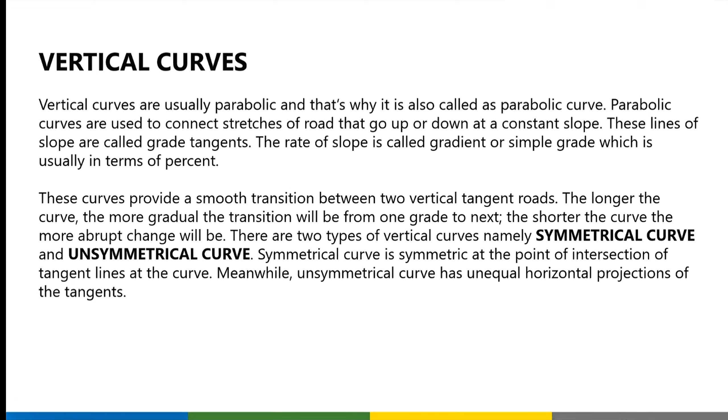There are two types of vertical curves, namely the symmetrical curve and the unsymmetrical curve. A symmetrical curve is symmetric at the point of intersection of the tangent lines of the curve. Meanwhile, an unsymmetrical curve has unequal horizontal projections of the tangents. So these are the elements for vertical curves. Let's move to the symmetrical curve. This is our curve with horizontal length of L.

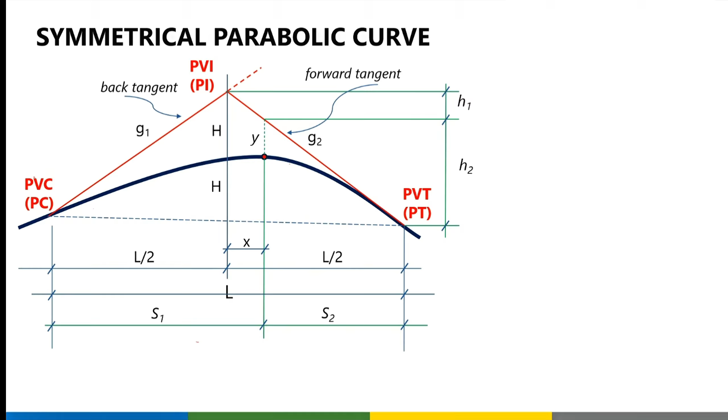So Y, tawagin natin to, from our point of intersection, pataas, punta dito, tawagin natin yan as our Y. Then, to determine that, meron tayong mga elements dito from the point of intersection, papunta dyan, tawagin natin yan as H1. Then, from dyan naman, papunta dito, tawagin natin as H2. Okay, so these are the elements or these are the formulas that we will be using for our symmetrical parabolic curve.

So for the formulas that we will be using for our symmetrical parabolic curve, first we have difference in grade. Okay, kapag sinabi nating difference in grade, just get the absolute value of the first grade and the second grade. Okay, so G1 minus G2. So kung mapapansin niyo yung G1, kapag summit curve tayo, pataas siya. Yung G1 natin, yung grade 1 natin ay positive. Yung grade 2 natin or yung grade ng forward tangent natin ay negative. So positive minus negative. So magpa-positive to. Pero most of the time gagamitin natin ay yung absolute value.

Next, we also have external distance. The external distance, again, that is the distance from the midpoint of the curve to the point of intersection. And that is given by the formula H is equivalent to LA over 8. Okay? So, yung H natin, again, this is our H that is given by the formula L. What is our L? Length of the curve from PC to PT. Okay? And A is difference in grade, over 8.

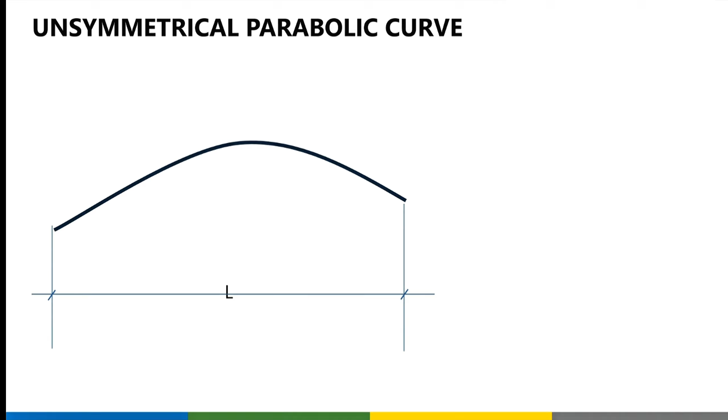How about pag meron naman tayong unsymmetrical parabolic curve? So let's say this is our curve. This is our back tangent. This is our forward tangent. This is still our grade at the back tangent. Our grade at the forward tangent. Next, this is still our PVC, PVT, PI or the vertex. And from our PI, hindi na symmetrical, hindi na equal yung ating hatian ng length. So let's say mas malaki, mas mahaba sa L2 compared sa L1. So this will be our L1 and L2.

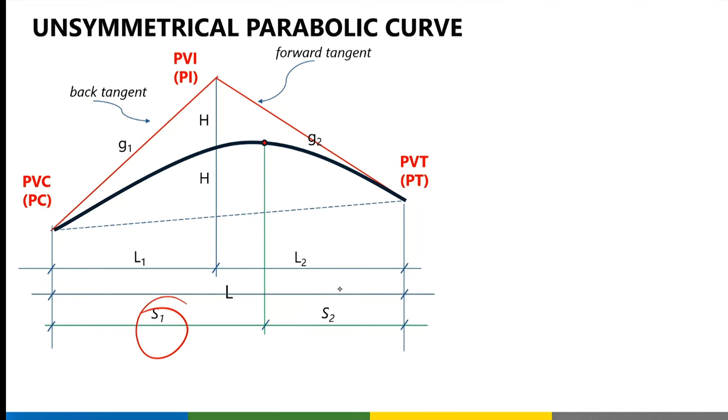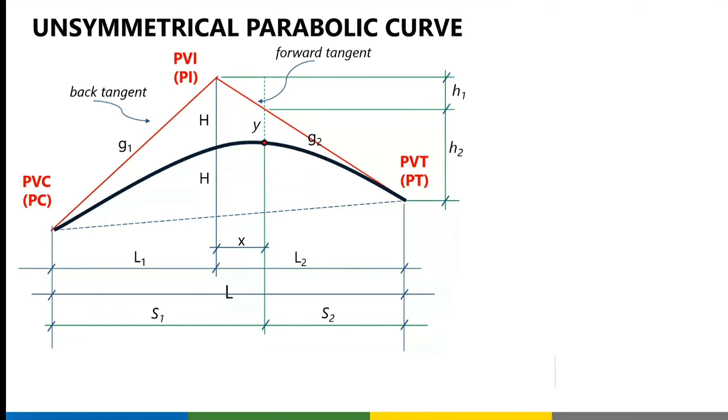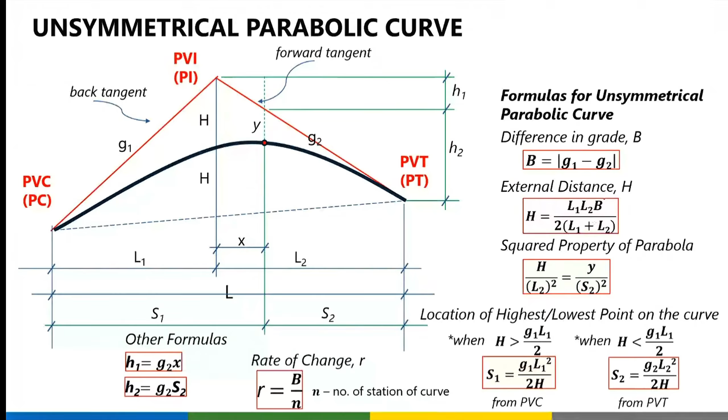So this is still our H, our external distance. So kung H2, H pa rin ito. So let's say we want to determine the location of our highest point. Ganun pa rin, S1, S2. That's still our X. And this is still our Y. Okay? So, punta dito, that is our H1. H2 pa rin ito. Ganun pa rin. And these are still our formulas for unsymmetrical parabolic curve. For difference in elevation, difference in grade, ito pa rin yun. Ang mababago lang ngayon ay yung ating external distance and yung location ng highest or lowest point.

So for our external distance, ito lang yung maiiba: L1 multiplied by L2 multiplied by B over L1 plus L2 multiplied by 2. So ito lang yung magiging formula natin. Next, for our squared property of parabola naman, ganoon pa rin yung concept natin. Kung magmumula tayo dito, kung ito yung h na kakailanganin natin, ano yung length niya or yung horizontal distance na i-square natin, L2. And kung ito naman yung i-ratio natin, y, ano naman yung horizontal distance, that is S2. Yun yung i-square natin. Always ang ini-square guys yung horizontal distance. Palaging papunta sa PT or sa PC.

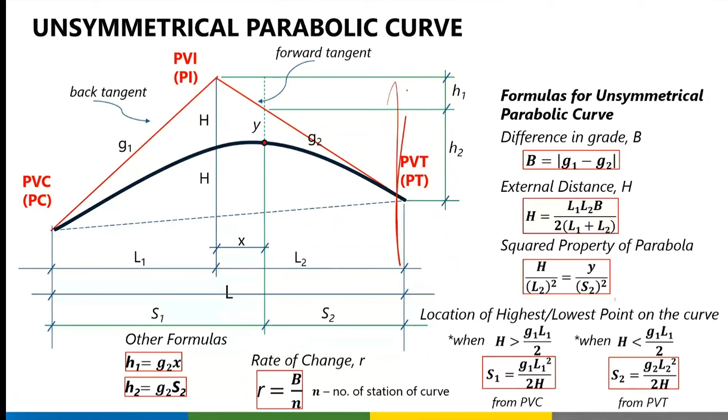So, ganun pa rin yung H1 and H2, rate of change, ganun pa rin. Next, ang maiiba na lang ay yung ating location of highest or lowest point on the curve. Okay, to determine the location of the highest or lowest point, kailangan muna nating masolve si H given by this formula and i-compare natin siya sa G1 multiplied by L1 divided by 2. Okay? If H is greater than this, yung location ng highest point natin ay magmumula sa ating PC. And that will be given by the formula G1 L1 squared over 2H. Pero kung yung H ay mas mababa kaysa sa G1 L1 over 2, ito naman yung ating magiging formula. Magmumula naman siya sa PT. Okay? So, these are the formulas that we will be using for unsymmetrical parabolic curve.